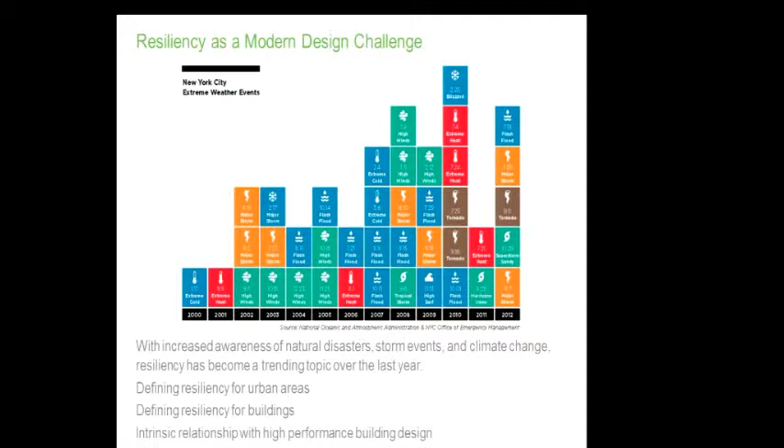Some of these not being quite scaled for—this is Superstorm Sandy right there—for the actual impact on our region and our city. We want to start to look at resiliency as not just an issue for the overall urban context, the large flooding we had, large natural disasters, areas being wiped out, but what it also means down to the building scale itself, and resiliency within buildings. And then what is that relationship back to high-performance buildings in general? What are the linkages there, where we see overlap between those two?

So Urban Green, you've probably heard of them for the Green Building Task Force that they put together to propose updated building codes for the city. The most recent task force they put together is this Building Resiliency Task Force, which was teamed to look and really research this topic of resiliency post-Sandy and what that would mean for the city.

They came together, we are part of the overall larger team—you saw many of the names before on that first slide. They came up with general recommendations, about 18 in total, that outline building and citywide or urban scale design measures to enhance the potential for resilient design of the city. It focused on retrofits for commercial, multifamily residential, and the smaller home scale.

And they really tagged all the different aspects here: stronger buildings, how do they build those initially more resilient; backup power, how do we deal with long-term outages, backup means for that; essential safety, really life safety here, survival as well.

And then better planning. So in the future, how can we be more prepared for such disasters?

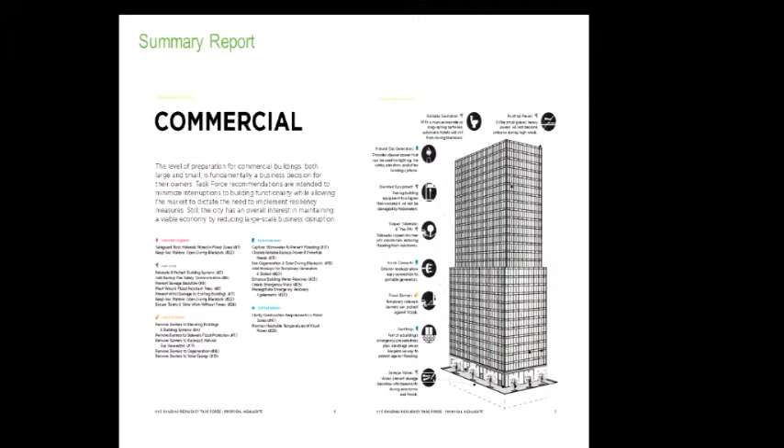Just a snippet of some of the summary pages you'll see in the executive summary of the report. The commercial project with a bunch of the highlights there, multifamily residential, the scale of what that would look like, and homes as well there.

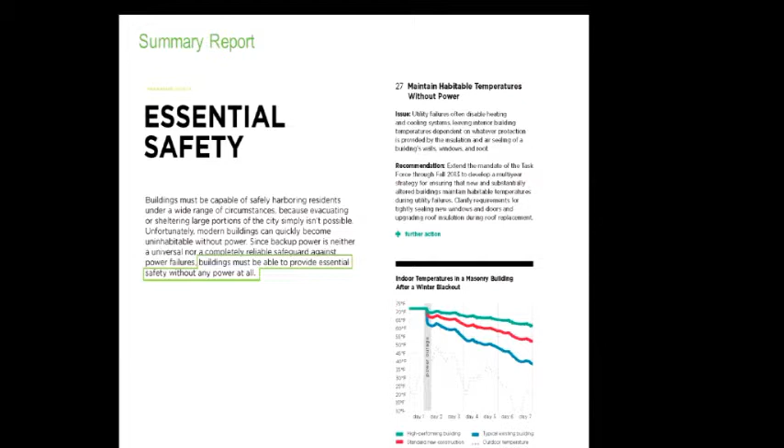Essential safety is really what we focused on as our part of this project. We looked at how these buildings or retrofits could really provide shelter, a safe, survivable condition without any power at all. So that's where you see the temperature drift come into this.

We were tasked to look at the standards and critical strategies for maintaining resilient design. In terms of the envelope, we looked at improved insulation, high-performance windows, air tightness, thermal mass, benchmarking.

How do we look at the existing building stock and really determine where we're at? How close are we to succeeding on this? How much work really needs to be done?

And then we verified through simulation, which is what we'll go through a little bit later with the Viper tool, how we can really maintain these habitable temperatures.

And I guess another important thing to add here is a lot of the outcomes we saw from this, in terms of those envelope improvements and the things we outlined for the resilient aspect of things, were also very much in line with what we saw for just good high-performance building design.

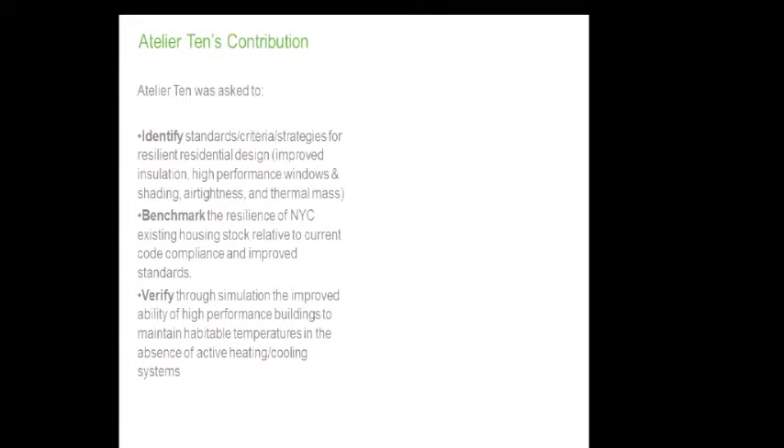And it was nice to follow off the momentum of Superstorm Sandy to get that into people's minds and get people thinking about that. And this was a very timely report, I think, for what we were dealing with here.

These were the four types. So we looked at modeling the wood frame housing, masonry multi-family row house, the low-rise, and then the high-rise construction for apartment buildings.

And the assumptions for these baseline models were taken from another urban green study, the 90 by 50 report, which looked at reducing carbon emissions for the building stock of New York City by 90% by 2050.

I'm missing the slide on that, but that is where our main baseline assumptions for these different scenarios in our model came from. And then we looked at higher levels of building performance, so that's our baseline.

Where do we measure beyond that from existing codes or proposed codes, or just general pushing things to the limits of high performance construction there.

On the data side, the weather data coming into these models, we looked at basically the two worst case scenarios, so either extreme heat or extreme cold for the region.

January, we looked at the classic TMY3 file you'll see in the light blue. We looked at the historical data from 2011, 2012.

And then we also had considered for a while, just in the previous presentation, the use of a future climate file, and was that something that was appropriate for this case.

And then in the end, we'll see more graphs later, but we would have the high performance case, an ASHRAE 2010, the upcoming code case.

We have the 2007. A lot of us benchmark our buildings on that versus LEED nowadays, the 2007 model. And then the current existing building stock.

And then you'll see in the graph the actual outdoor temperature and what we're trying to offset there.

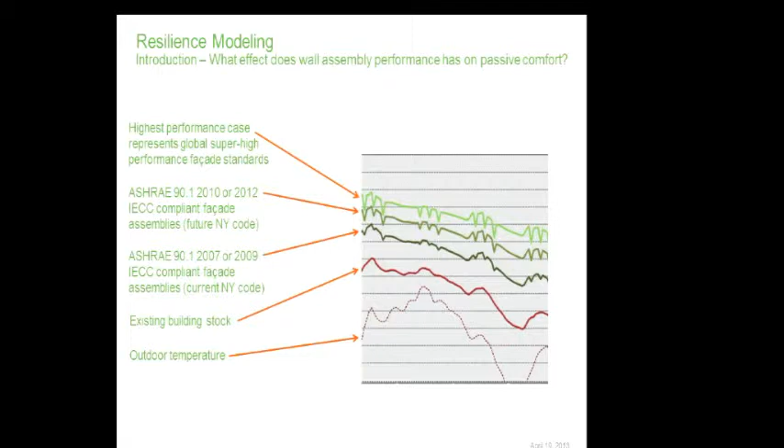So, turn this over to Mike.

So this was kind of our maiden voyage for the use of Viper and the Viper component in Grasshopper.

Is that any better? Good.

The scope of our analysis was to look at different performance criteria in relationship to 4 different residential apartment types. The DIVA for Grasshopper component lends itself to that. We were able to set up this whole study parametrically and also link with Excel for both the input and the data visualization in the end.

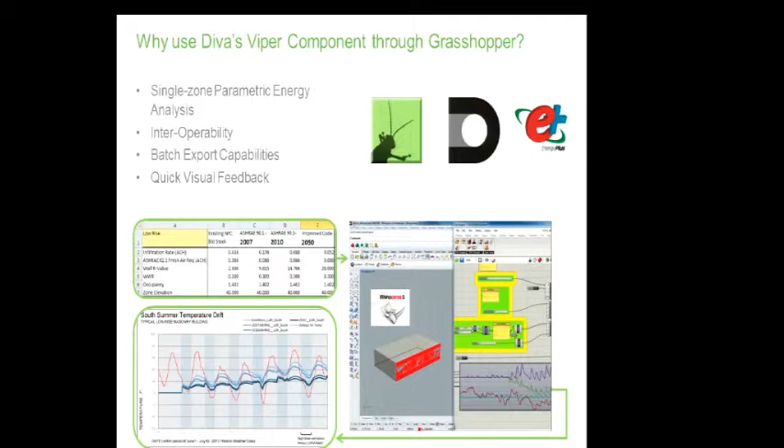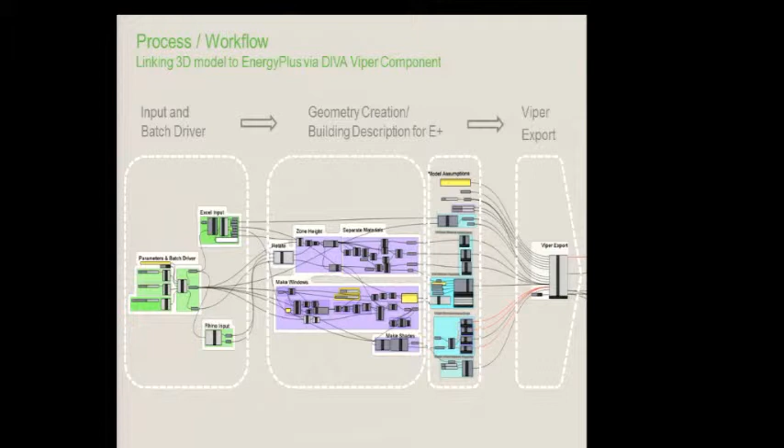Talking about process and workflow, this looks very familiar to a daylight kind of parametric setup, with the input on the left, the main geometry translation components in the middle, the building description components, and then the export. Here it is simplified. You'll see we added the Excel input and the Rhino input, as well as the batch driver on the left side.

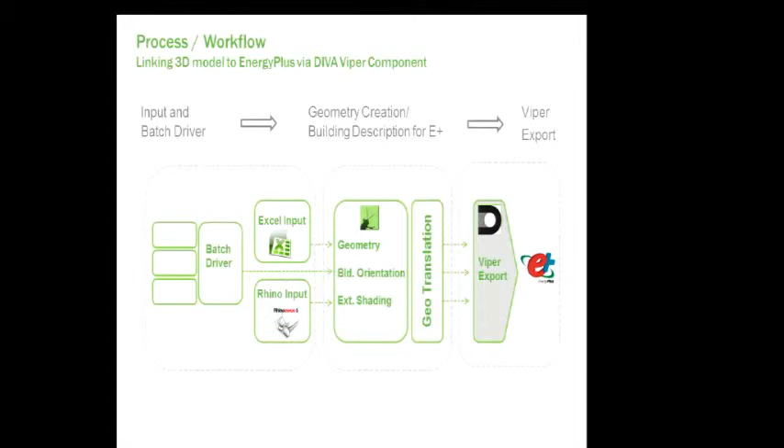We decided that a lot of the parameters for this study dealt with numbers that were best handled in Excel through spreadsheets. So having that component and the ability to link and update Excel and have it relink to the Grasshopper file was pretty critical to the study.

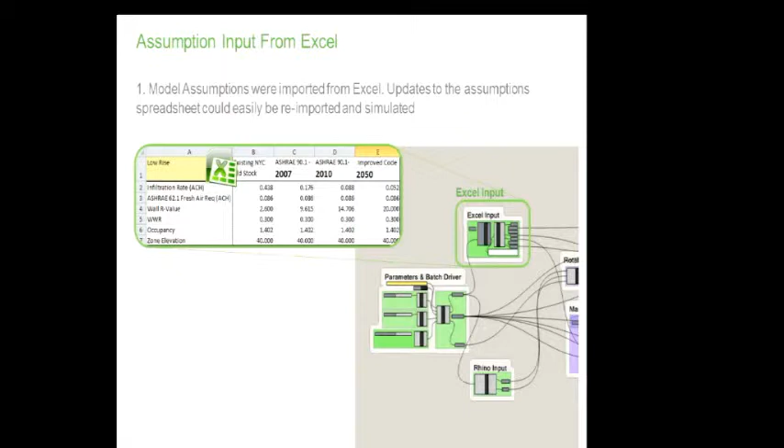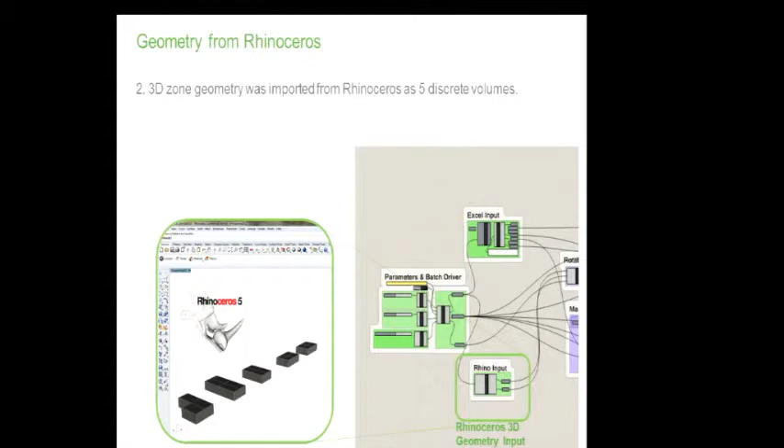And then sorry, wrong button. You have to click it again, I think it's the button. Okay. Do it here. Oh yeah. Click it? Yeah.

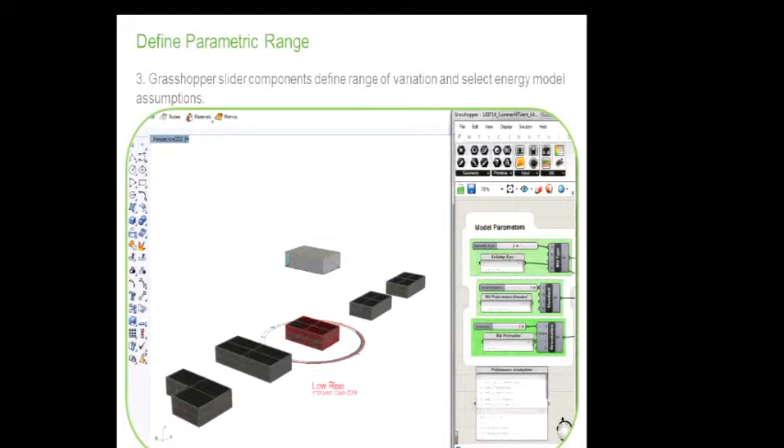We control the variation within the model using 3 parameters. One was the building type, selecting between the single zones. The other was the standard - existing stock versus ASHRAE 90.1 2007, 2010, and a projected improvement. That parameter selected a series of values from a list in Excel - different infiltration rates, different R values, and so forth. Then there was a final component that tested orientation: south, west, and north.

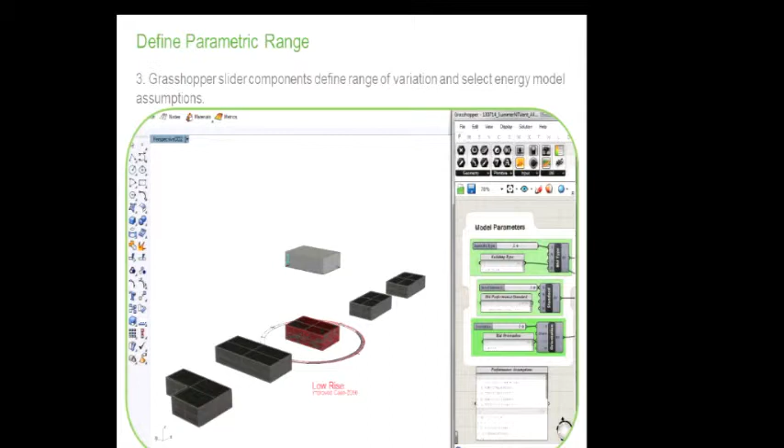In the end, there were 60 different models. We found it very easy to customize the material selection and even select different material choices based on those parameters we defined in the beginning.

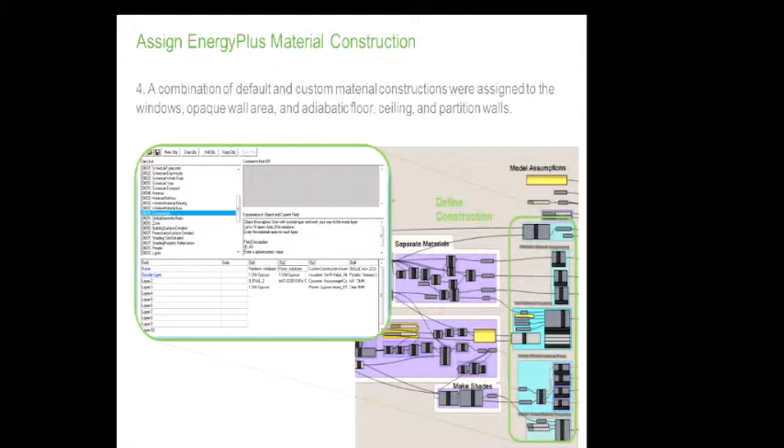We did have to go in through the IDF to create some custom adiabatic materials, but for the most part it was very easy to parametrically test different materials, especially with the set R-value opaque wall component.

We did not find it so easy to turn off the HVAC, for example, or adjust some of the schedules. For that, you definitely had to leave Grasshopper and go in through the IDF folders on the C drive. But in the end, it wasn't very difficult either.

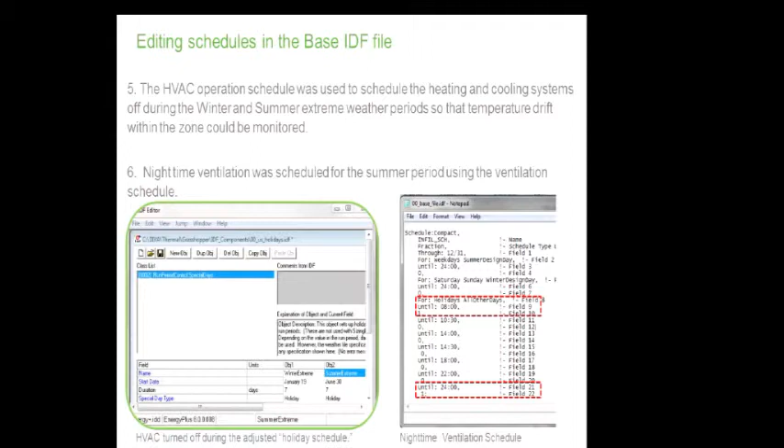We used the holiday schedule and linked it to the HVAC operation schedule to turn off the HVAC during those extreme periods. And then we scheduled nighttime ventilation during the summer, which was just as easy of a fix.

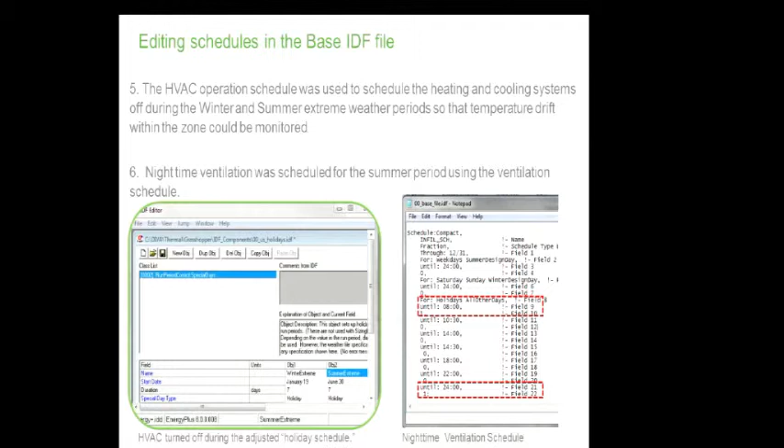The batch driver component was one thing we developed that really helped animate through each of the 60 models and export in sequence - really just a time saver, with a kind of trigger component that you just double click to set multiple at once.

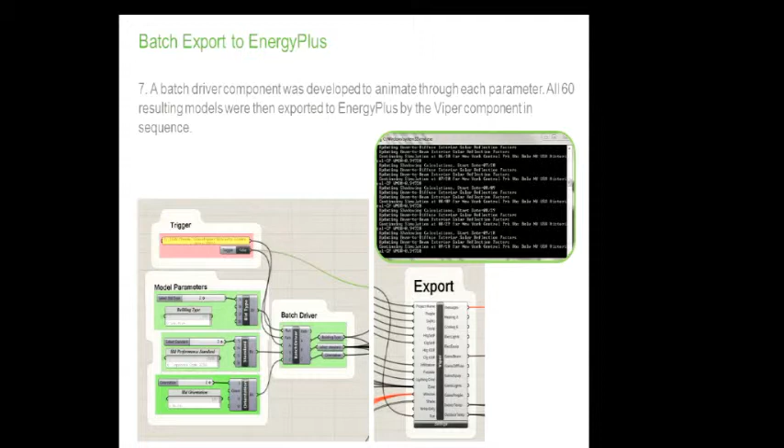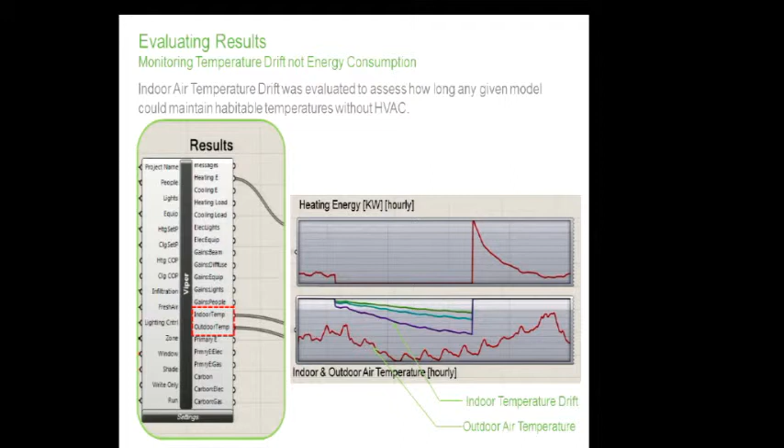This is in the winter. Below that, you're looking at the temperature drift - you'll see it approaching the outdoor air temperature. The purple, teal, and green lines show different performance criteria. Whereas you can review all these results within the component, we are really just looking at the indoor air temperature and outdoor temperature.

Let me get a quick drink.

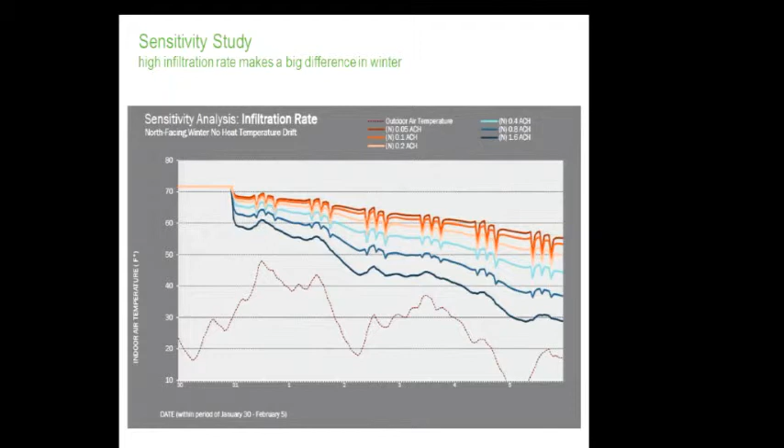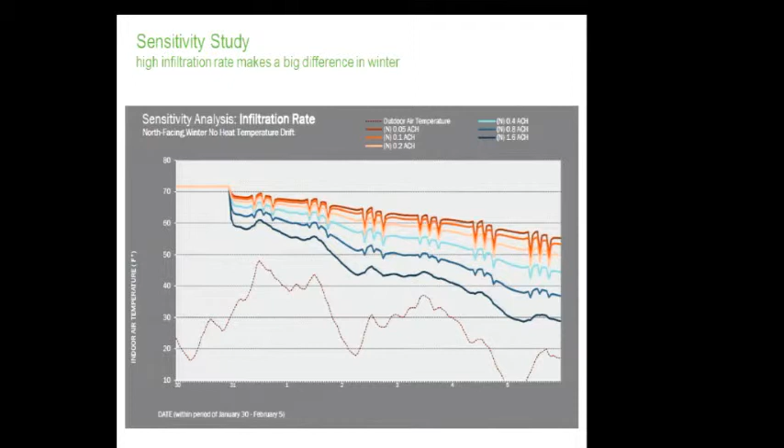With most studies, including this one, we like to perform sensitivity studies to begin with - one, to validate that the model is performing as expected. So this was one of them, where we tested different infiltration rates and the effect they had on the indoor air temperature. As you'd expect, in the winter infiltration rate has a huge impact on that temperature drift within the space. This helped us understand the results of the other multi-parameter simulations.

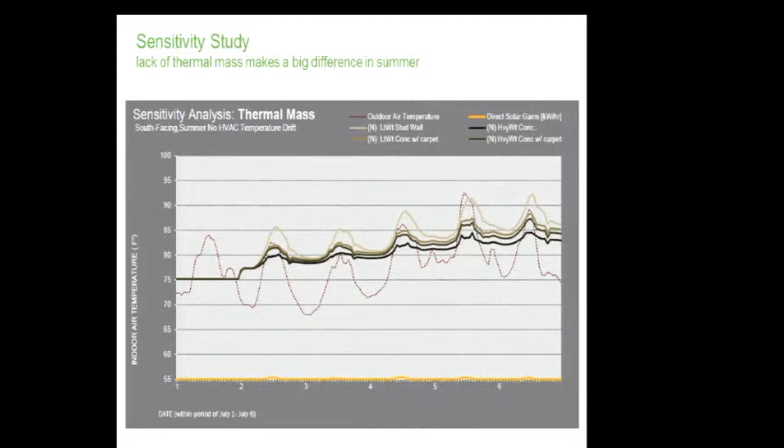This is another sensitivity study that looked at the effect of thermal mass, and in the summer this had a huge effect on tempering the solar gains. This is a south-facing apartment, showing those peaks in solar gains corresponding to the indoor air temperature peaks.

And really the concern, we shied away from coming up with a threshold for the absolute minimum temperature you'd want, because it's a very complicated number to come up with. It has a lot to do with how long you're in that space at that temperature, clothing, age, and so forth. Kind of similar to that glare study that Olson did, where there's always that one dissatisfied person and the other person that can put on some clothes.

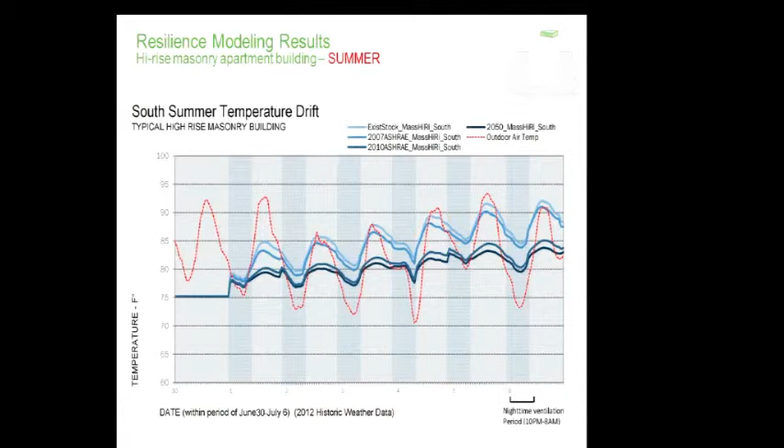This was the summer case. Again, it confirmed that the improved standards, including exterior shading on a south-facing apartment, really helped to reduce that peak temperature drift during the summer period. These bands here correspond to the nighttime ventilation, so the building zone is able to cool off at night.

And then our key findings were more in kind of what you would expect in terms of improved insulation, high-performance windows and shading, air tightness, and thermal mass, increasing the ability of the building to maintain habitable temperatures without HVAC.

We also found that New York City's existing building stock is most at risk in the event that power goes out, in terms of temperatures falling below healthy survivable temperatures. And then another thing was we kind of realized there's value in simulating without HVAC, designing a space to perform without HVAC and maximizing that period.

Some of our comments on the Viper tool, which we've used since for other studies, is that it's great for these parametric geometry studies, but sometimes it can be difficult to edit schedules. It also has a limited set of output variables.

One thing we would have liked to add to complete the thermal comfort narrative is radiant temperature and relative humidity. These things were a little harder to come at parametrically, which leads into the difficulty of assessing the holistic thermal comfort of the model.

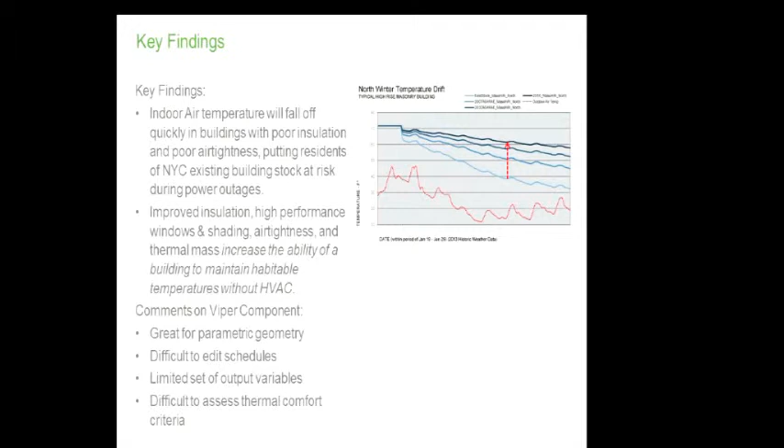So ultimately, this brings us to the question of, with this information and with this proposal to the city, what can we really do with this in terms of promoting this passive building design or really resilient buildings?

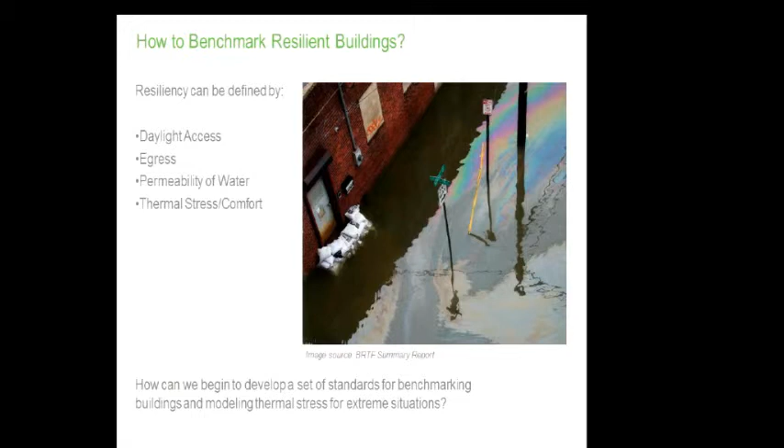How can we adapt this to really become a set of benchmarks or modeling standards that is wrapped into the workflow for most projects or ongoing projects?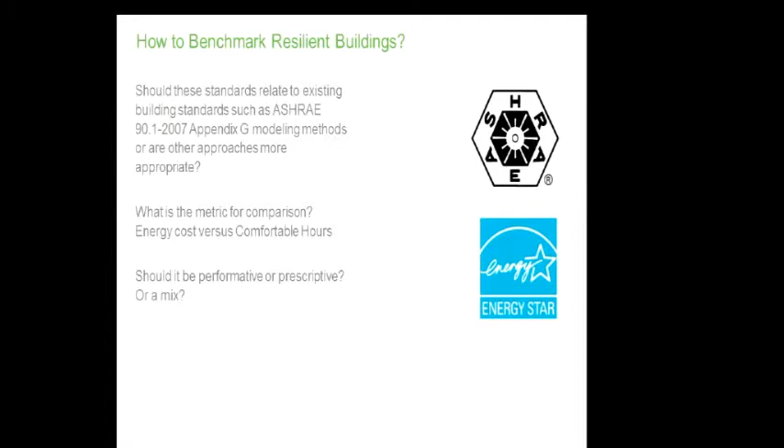We thought, how might this apply to a system similar to the Appendix G modeling guidelines for the code standard buildings? But what's the metric for comparison? Here we've used comfortable hours or temperature, but that doesn't work with our current practice of energy cost comparison. And should it be performative or prescriptive in its matter as well?

And then, like Mike was saying, what are really the physiological limits of the human body? Can a person withstand maybe more sporadic times of extreme weather, whether that's hours or days? Or is the limit also just within a withstood period of time of those conditions?

And how do we look at the adaptive comfort zone? How is that defined for different climates, different places worldwide? How can this be adapted to really be looked at under different cultural conditions and things like that? And then where do we draw that line of what's really comfortable versus what's survivable and really functional for a human being?

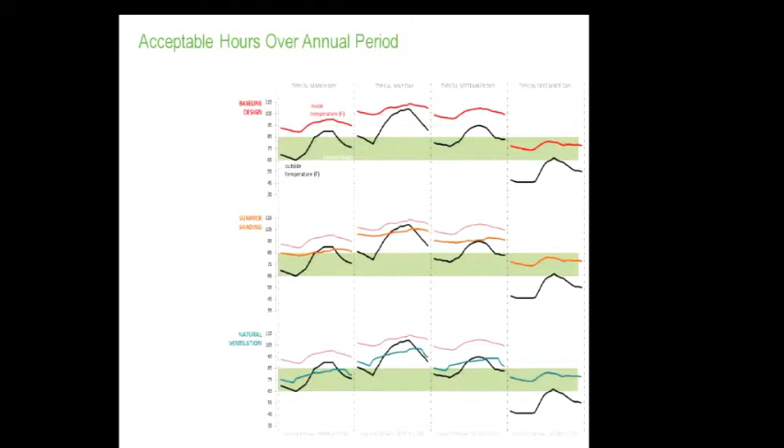So we've looked at four things here. This was a study done to assess passive strategies, looking at a baseline condition, adding some summer shading for the external window openings, and then natural ventilation - how those temperatures are brought more into those green comfort bands with each of those measures. And then that's translated into more of a binary timeline for your hours of the year, and whether or not you're comfortable.

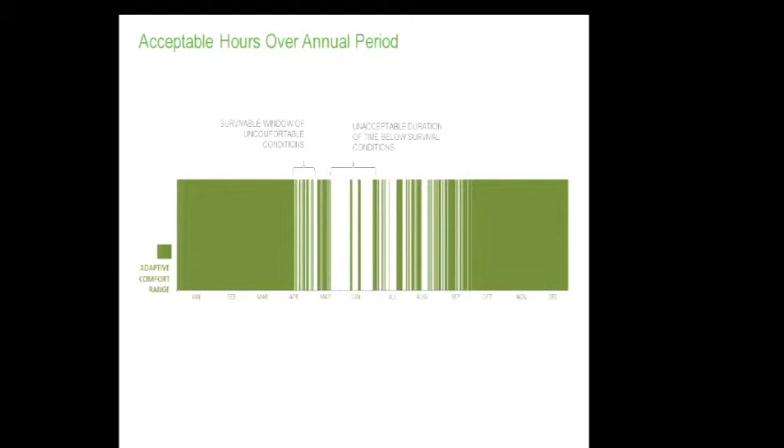It would be green for where you can work within that environment, or white, where you're outside of the comfort range. And like I said before, what becomes a survivable window of time and what's really unacceptable, and how can we start to chart that out.

So this is one way of looking at it. There's the Universal Thermal Climate Index, more of an outdoor metric right now, which takes into account direct solar, temperature, relative humidity, wind speed, things like that. It rates your hours, plotted over the month, from extreme heat stress through a comfortable no-thermal-stress condition

through to your extreme cold stress. Maybe that can be adapted so that for real survivability, we're talking about you're either comfortable, or semi-comfortable, or in a kind of dead zone beyond that, your extreme periods. And maybe as you add in more passive measures to the envelope of your building, you can get rid of those issues on the perimeter of your survival situation.

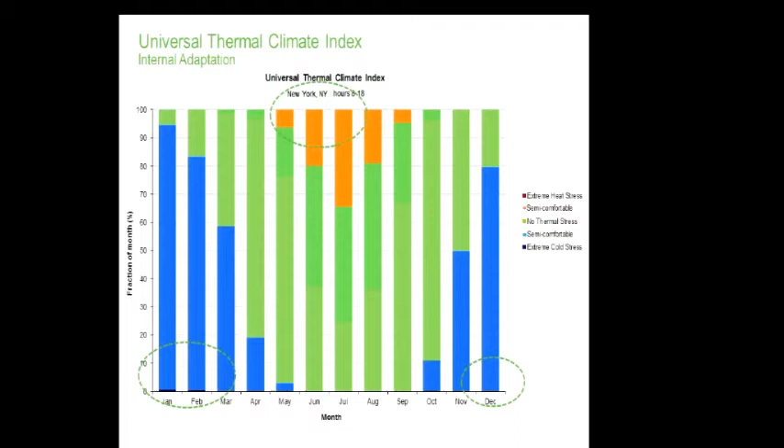And while you also do those things like adding shading or using natural ventilation, you increase the number of comfortable hours as well. And how can this apply comparatively for different climates?

Maybe your baseline survivable hours you need to achieve is much smaller in New York - you just have some extreme heat, some extreme cold. But in an area like Las Vegas, maybe there's more extreme heat to overcome. Maybe if you can achieve all those hours, that's your baseline - you've achieved the baseline in this benchmarking system.

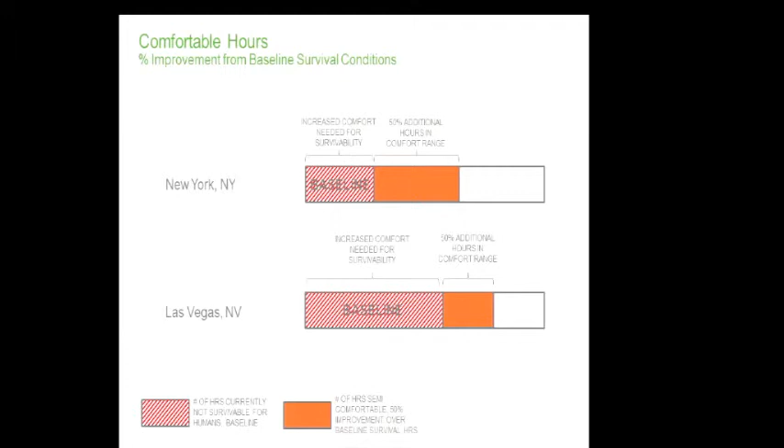And maybe a percentage of hours beyond that, getting those into a comfortable situation, might be the next step in that rating system - kind of like you have your LEED levels. Maybe the system has some sort of threshold building on how much more comfortable you're making people in these buildings for these non-power situations.

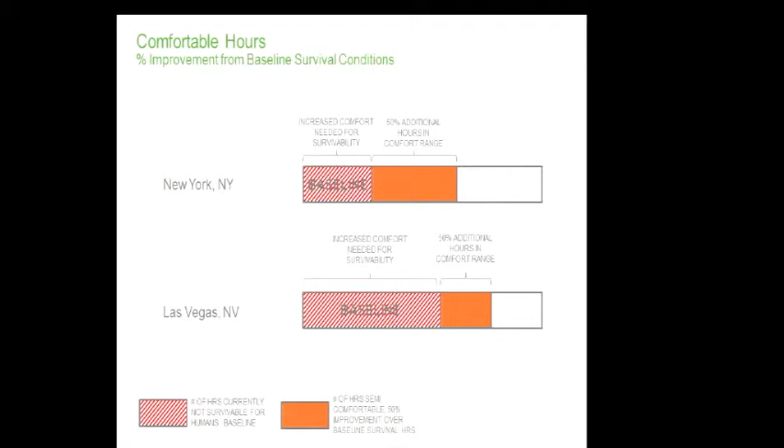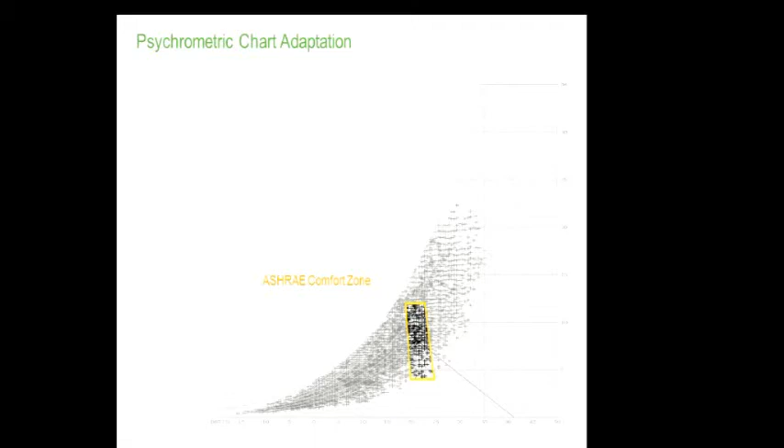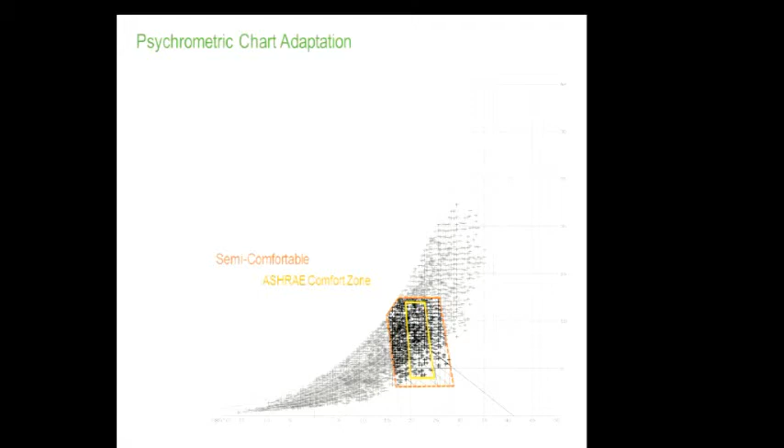But then you can maybe have a semi-comfortable zone where people start complaining, but they can survive - if you're trying to make it day to day, you can survive in those conditions, not very comfortably. And then maybe you have exactly the survival condition.

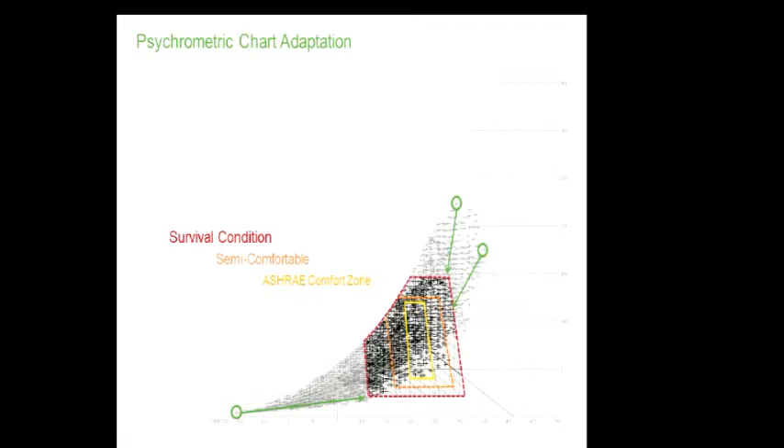And the goal of the system would be then to get all of these points inside of that dotted red line, within there, in order to achieve a baseline performance for a building for survivability, for this resiliency.

And what is the shape of that? We just have this drawn on diagrammatically - we need to define that. That's something I think is really cross-disciplinary. We need to pull in the health industry, really see where these limits are and how that would work. But again, just a proposal and a thought.

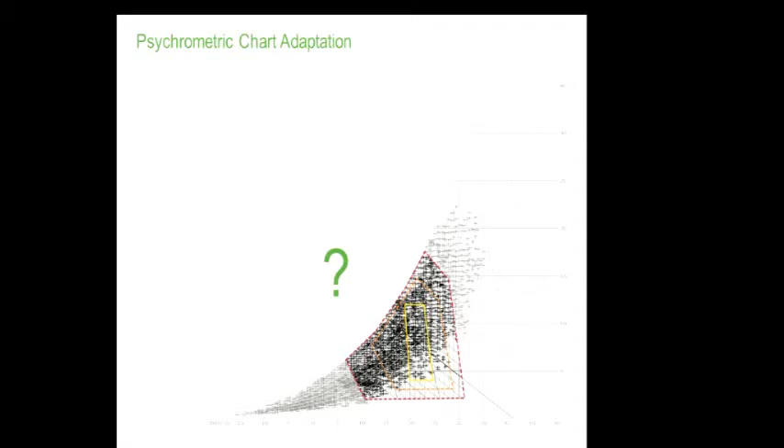So with that, we'd just like to show that we've tried to set some kind of minimum compliance for resilient building performance, and I think the city, with this task force, is now trying to move in that direction. But how can it serve existing buildings versus new construction? That's yet to be told. Again, defining those limits for the human body for survival is the underlying factor of it all.

And then how can we also look at stable climates versus diurnal swings? How is that going to affect the recommendations that might be in this benchmarking set? And then crossovers between passive design strategies - I think there's a lot of things that, if you're doing this to increase the survivable condition, you're also going to be increasing the building performance day to day. So it's kind of a win-win.

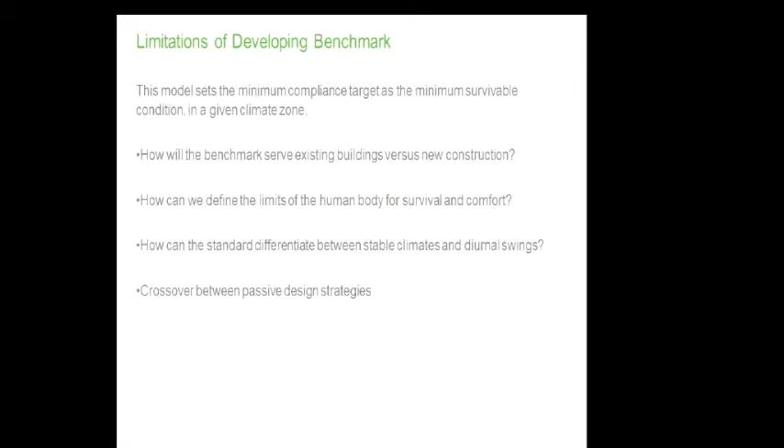So with that, any questions?

Yes. I guess on the level of survival, you say that we're always thinking about the drastic extreme. And in terms of what we're willing to put up with at extremes, on a day-to-day basis, we go to work and we're in an office building and we expect AC and light, to be in a comfortable situation. But then you go to the survival side, and not to go way to an extreme, but say, for example, when you go camping, you're willing to deal with a couple mosquito bites and a slightly warmer climate. So what is that extreme that you're going with when you say survival? Like, what is that?

I think the question is very similar to those of us who've been in New York or the Northeast the last couple weeks. Maybe day 1 or day 2 would have been uncomfortable, but we could have managed it. But the heat exhaustion by day 3, 4, 5 becomes the point where people start dropping like flies because it's just no longer comfortable. You can't function in basic human things like moving from space to space, or smaller tasks. If we're in this kind of condition, the city or the context you're in might shut down, the world might change its behavior for that period of time.

Similar to Sandy, we saw shutdowns across the city for a while. Maybe we're not trying to keep it so people can function the way they had the day before, but trying to define that to a more expanded range, and we haven't drawn those lines yet.